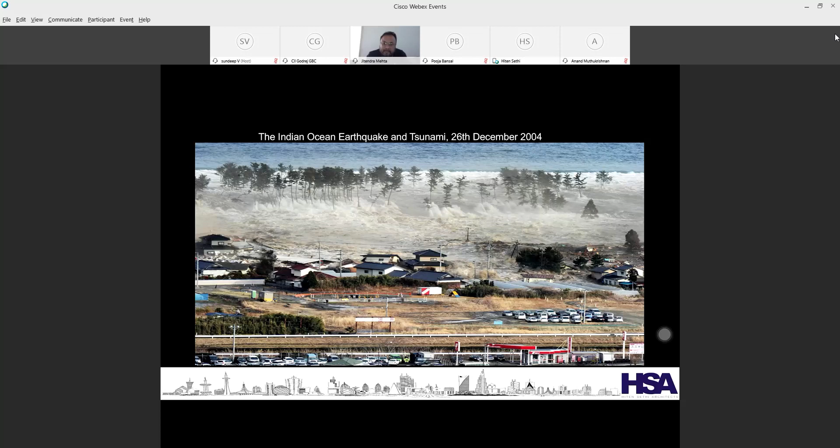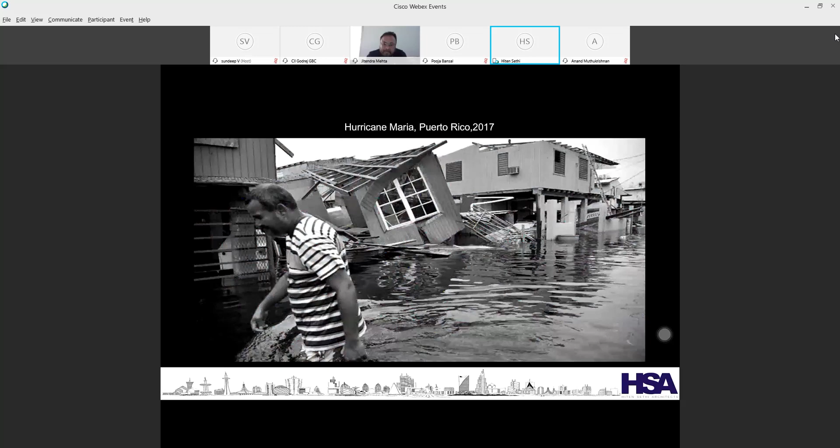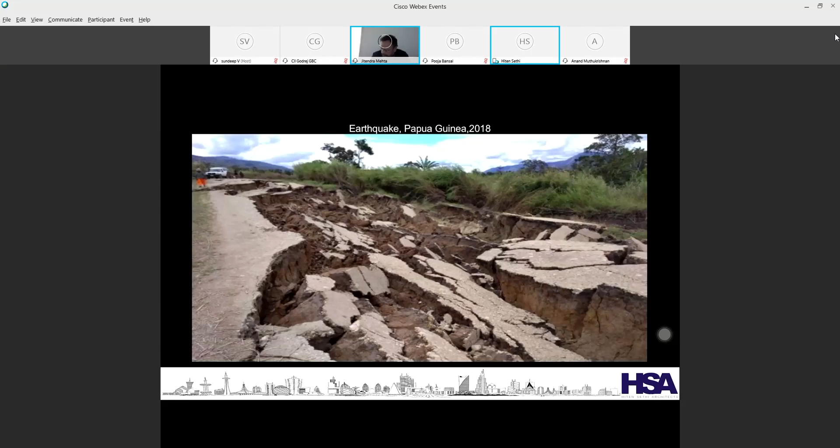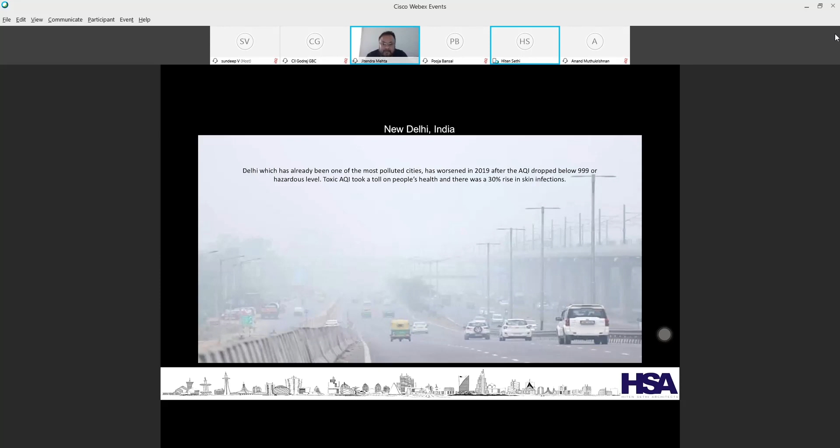And finally, we come to a conclusion that we are the problem. And fortunately, we are also the solution. And our Earth needs our help. We are professionals in different fields. Right now on the platform, we have architects, builders, engineers, environmentalists, manufacturers. We have the solutions. We cannot change the world, but we can definitely do our bit to change the world. So what more needs to be seen? There's a visible climatic change which triggered the green building movement. As participants from the building industry, this is what we can become a part of in a very serious and matured fashion.

What is part of sustainability? It is just a symbiotic meshing of region, city, district, site and building as a powerful synergy. I read one question asking whether green buildings and sustainable buildings are the same. I think they are synonyms. We see green as a color of peace, of freshness, a color of growth. Sustainability is just a way to achieve that. So basically, green architecture or sustainable architecture works out the same. With this, I would like to start my presentation on a case study.

We are doing right now a National Cancer Institute in Nagpur. Many of you know Nagpur has a very extreme climate, and there were no major super specialized hospitals like cancer institutes in central India. So this location was not only feeding Nagpur and Maharashtra, but also places like Raipur, central Madhya Pradesh, Jabalpur, and all those places around.

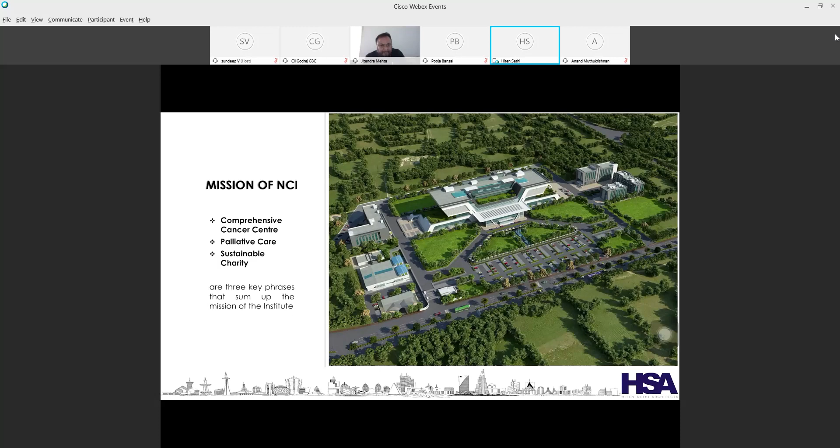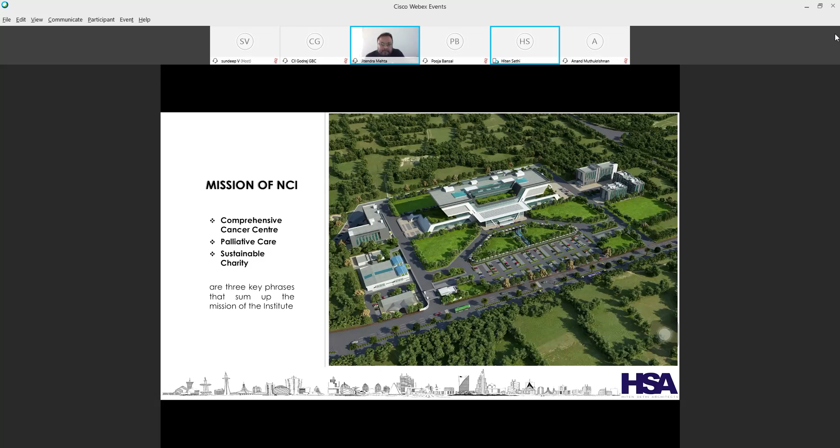This hospital is already serving right now, I think phase two has been handed over, and it is charging even less than what Tata Hospital is charging in Mumbai. So when we started developing this design, we thought, what will be my basis of design? As the project needs a curable solution, the first thing was that we need to talk about stability.

Then we wanted to talk about sustainability. Then we wanted to reflect positivity. Most important for such kind of projects is credibility. To get to these things, you need out of box thinking. It's not only out of box thinking for architects, it's out of box thinking for people who are going to use this place. It's an equally creative place as design studios, because the total treatment for this disease itself is quite an unconventional system.

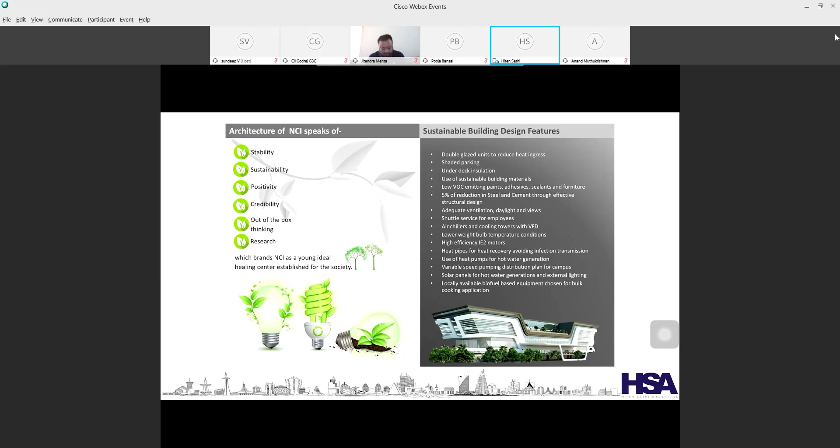And most important, which we realized when I was representing the government of Maharashtra in one of the conferences in Israel, was research. There were many new treatments coming out in terms of stem cell therapies and other therapies which are non-intrusive. So this was a brand which NCI wanted to take up as a young ideal healing center to be established in society. We'll come to the sustainable features which we added later on.

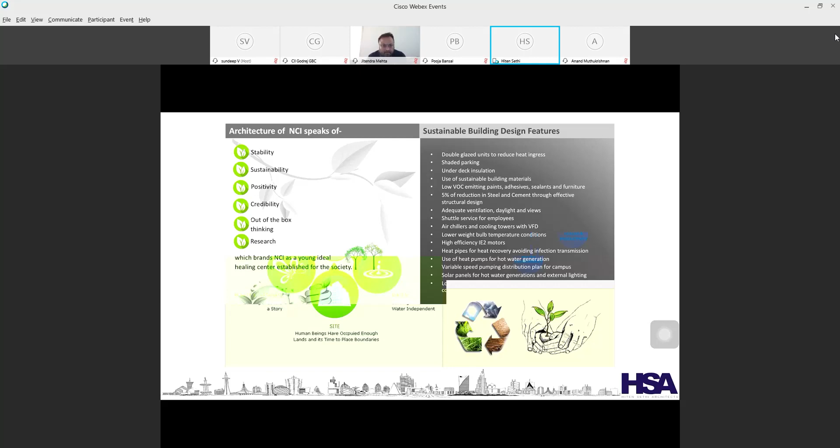But what we started with was how do we start the design? We got a site which was totally south oriented. The whole length of the site was facing south, and very interestingly, it didn't have much depth. So we did some case studies. There are seven different services we are offering, which I'm going to share in the slides later. So how do we start it?

As any architect would do, we do a sustainable study for the location of the site, the orientation of the site, the soil quality, the features in and around the site, the future developments proposed around it, the highways, since this is on the main highway and more are proposed, and how you want to tackle all these things in the design solution.

There is a misconception when I talk to people that green building design is only about using good technology: I'm not using CFLs, I use LEDs, I'm just using basic paints. It isn't. It's a part of the design solution. It has to start from the time the first idea starts to evolve in your mind. What is your structure going to do? How is it going to be functionally responsible?

Now we don't talk about beautiful buildings, because all architects are on board with beautiful designs. What we're talking about is a very simple thing: what is the performance of the building? What is the building performance index over the life cycle of the building? That is the total focus, these are the features you want right from when you take up the pencil to the last day when you hand over the keys to a client.

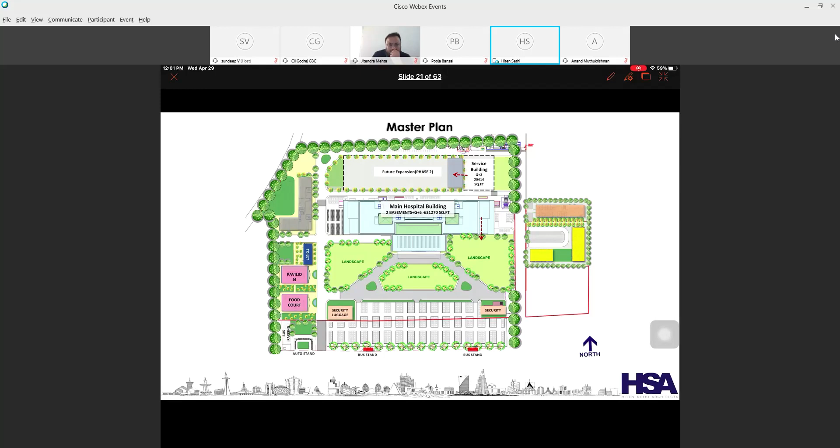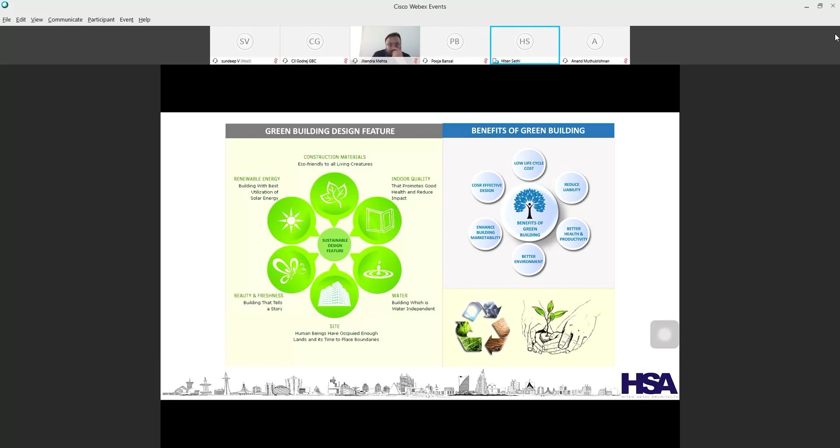So let me explain the design. As you see, my total project is on the southbound highway, so we created a quite interesting buffer in between the building and the highway. I've taken the building approximately 120 meters inside, so that I get an inner buffer coming from the main highway to the main building.

We had a strategy where we could have spread the whole project into different buildings, since there are 5 to 7 departments that are going to happen. Considering the climatological presence in Nagpur, we decided to consolidate all the MEP services and backup into one building, so that we can talk about more efficiency and recyclability of all the materials and spaces we are going to create.

Since this is charitable, we wanted to create a zone where we could give particular facilities free of cost to people. On the west side, we have a pink shade pavilion and food court, a shared kind of structure conceived for lots of Adivasis coming in who don't know about this particular disease, and who are detected at stage 3 or stage 4.

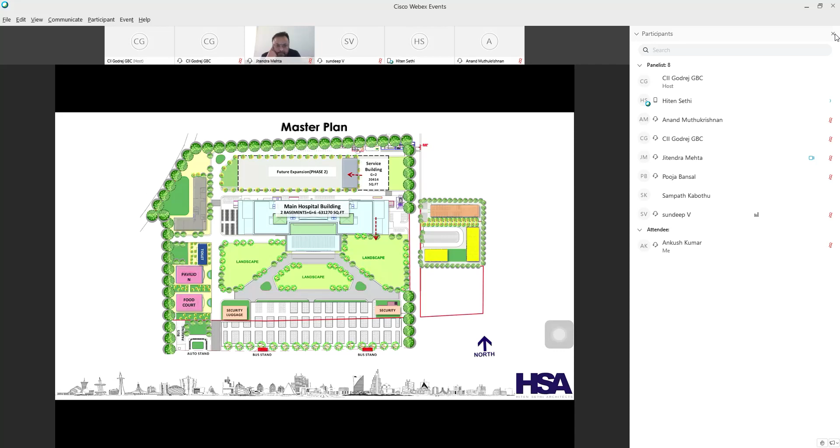So the ideal situation is that we have segregated the whole thing into particular zones. We created lay-bys at the entrance where buses will be standing, we talked about circulation patterns of patients dropping in and moving in and out, and we created the car parking right at the entrance.

Right now, presently, it's all covered with solar panels, and we are creating 1 megawatt of solar energy during the construction time, not after. We, in fact, installed these when my plinth was already coming up, so we have been using this energy to our benefit.

If you go further, the circulations we created separated pedestrian from vehicular traffic, and enough buffers and levels were created so that vehicular traffic is actually hidden away from the main pedestrian entrances.

We created a front porch where you see the ground floor entrance written - an independent, isolated 15-20,000 square feet entrance space detached from the main building. We wanted to start this building when we had just created double basements, where I had already installed my LINACs and other services, radiotherapies, CT scans, and so on. So instead of waiting for the main building, we created this entrance porch and dug a tunnel so construction could keep going on the upper level, while we started at least 70 beds at that stage in phase one.

By the end of a couple of months, it was 100 beds, and right now 220 beds are already in operation. We're just waiting for another year, and we should be able to hand over 500 beds.

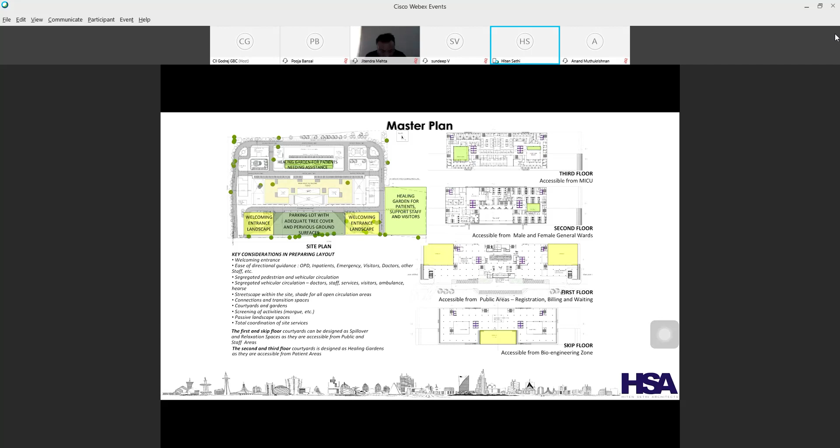Now, you'll be surprised - the kind of cantilevers and structural innovations we have done, with lots of cantilevers happening on the upper level, which I'll show you in the coming sections.

We've created those spaces in such a way that even the shadows of those particular cantilevers are supporting our healing areas, in some sort of shadowing strategy.

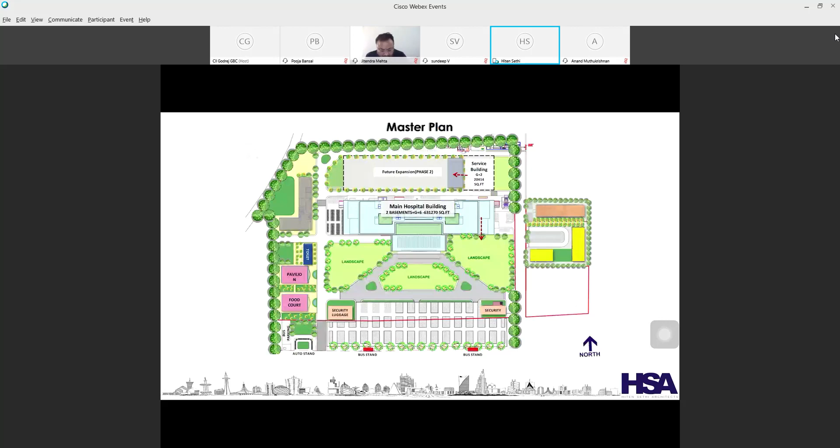So these are the basics, just to run through: we have entrance and waiting, reception, and diagnostics. Anybody working in a hospital understands how the blockings were organized in a particular way.

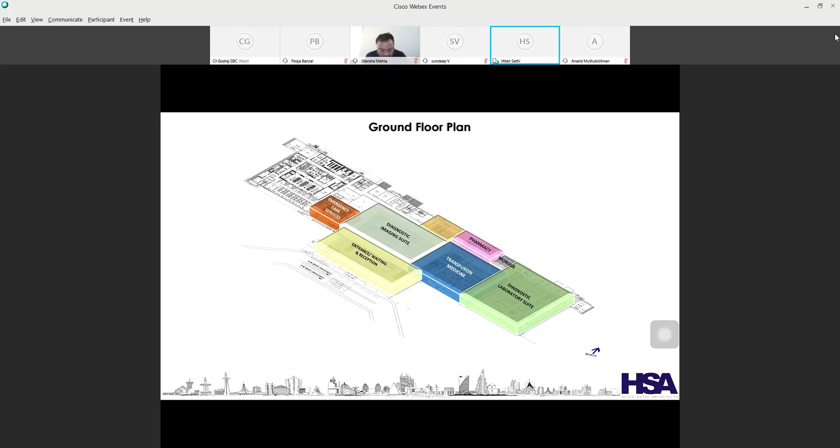The emergency services had a parallel road away from the 12-meter driveway that we created at the main entrance. We had admin areas overlooking the food, stationery, and other things in and around. So minimum walking spaces were the criteria.

Second, we also wanted less collision between different departments until the time it was required to move between them, so we divided the departments into various levels.

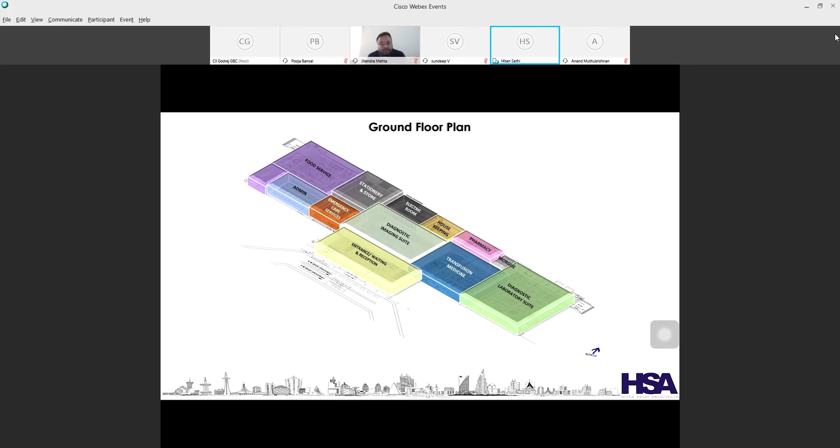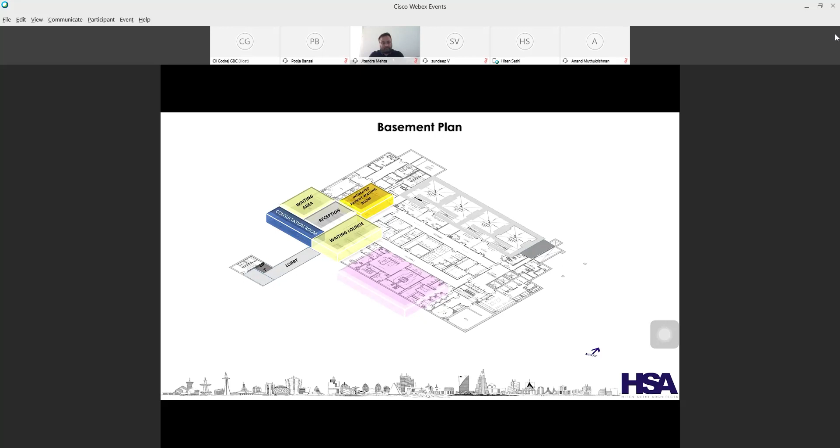As you see, we went to the basement first, so it's not a complete basement — we created a partial two-level basement. Then we have the tunnel which we created at the entrance, the lobby, a staircase, and a lift provided.

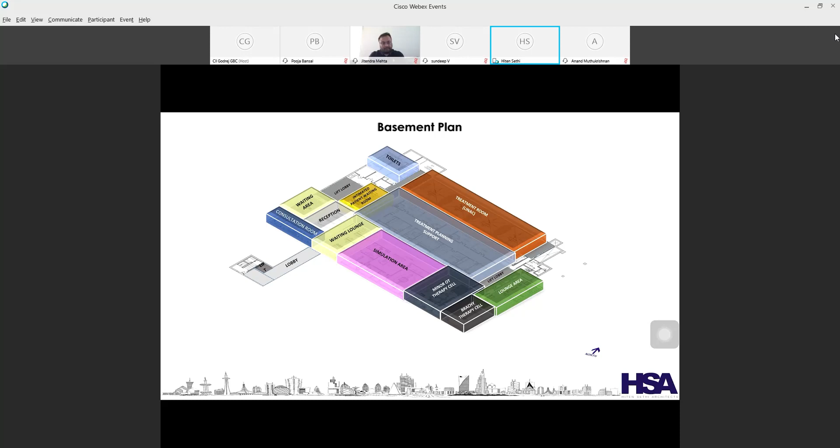So you enter and come to the waiting lounge, and all these clinical rooms and treatment planning facilities became operational within 1.5 years of starting this project. So even though the project went on a phased basis, we kept adding to the various levels.

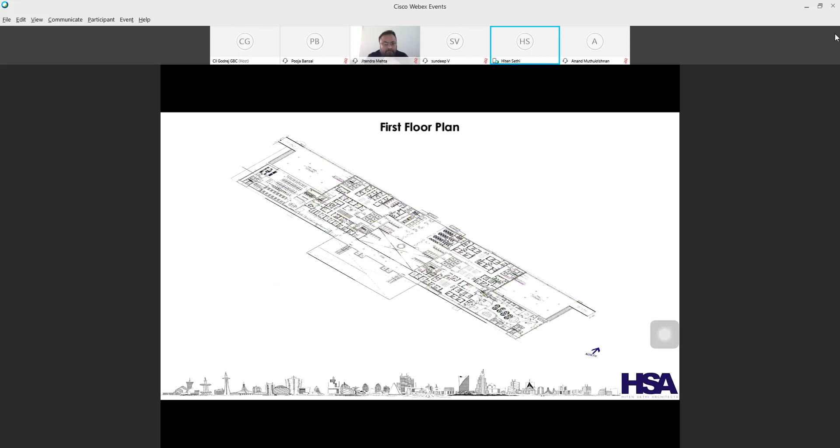By this strategy, we had the first floor plan where you have the ground floor, then come to the upper level. It's a very high ceiling entrance, and since Nagpur has a hot climate, we thought this might be an interesting feature to add.

Immediately next to that area, we gave maximum public interface areas like OPDs next to each other, and all OPDs were connected to cafeterias with open terraces. These terraces were designed with the special needs of cafeterias in mind.

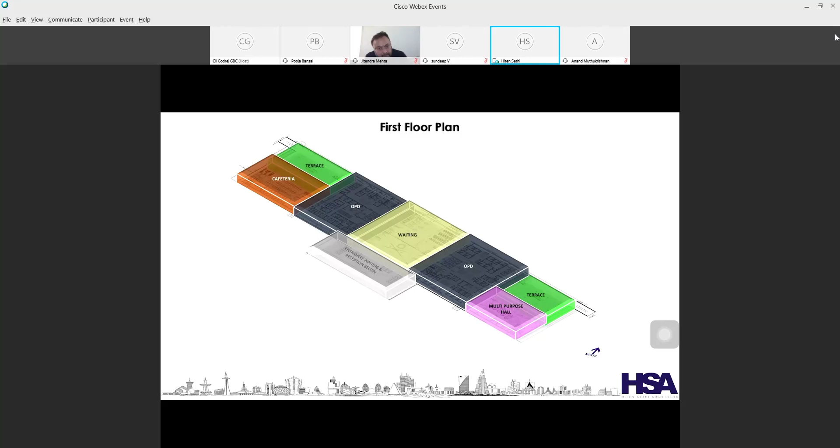Similarly, on the eastern side, we created a multi-purpose hall and the admin wing, which comes from the ground floor and has its own terrace. The multi-purpose hall opens into a pre-function area and to the terrace area.

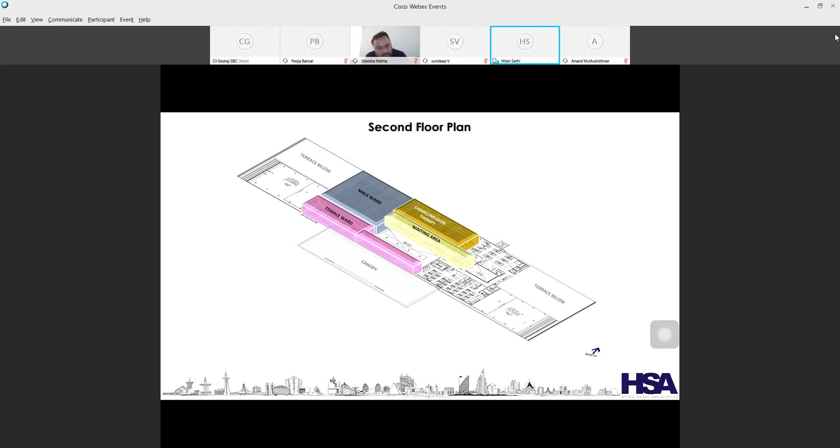Then we come to the second floor, where we have IPDs and various wards with their own waiting areas used for various things. You can see how the different departments have been placed so that they have their own privacy at the same time.

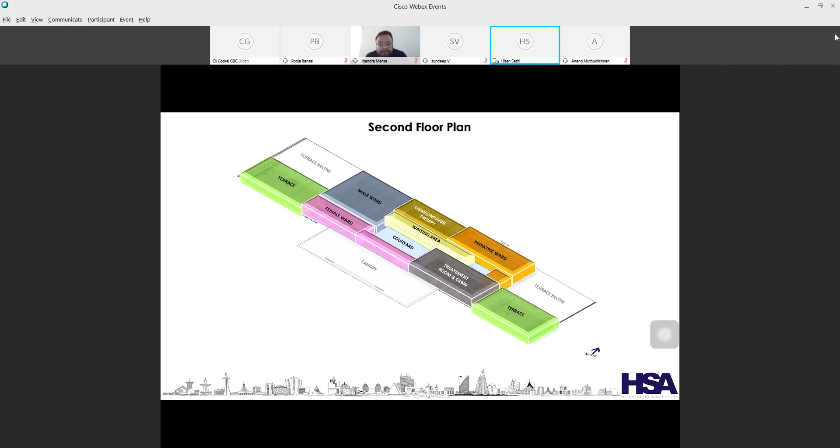At this particular level, we started adding courtyards at two different blue areas, where we have lots of infusions happening into the whole building, acting as light wells in and around it.

Then we have the third floor plan with typical residential MICU and ICU cubicles placed amongst each other. These courtyards actually gave support to the lift lobbies, and the lift lobbies themselves became well-lit with an interesting view, rather than the dead spaces we normally see in hospitals. This also helps create a good micro-environment in and around the project as we conceived it.

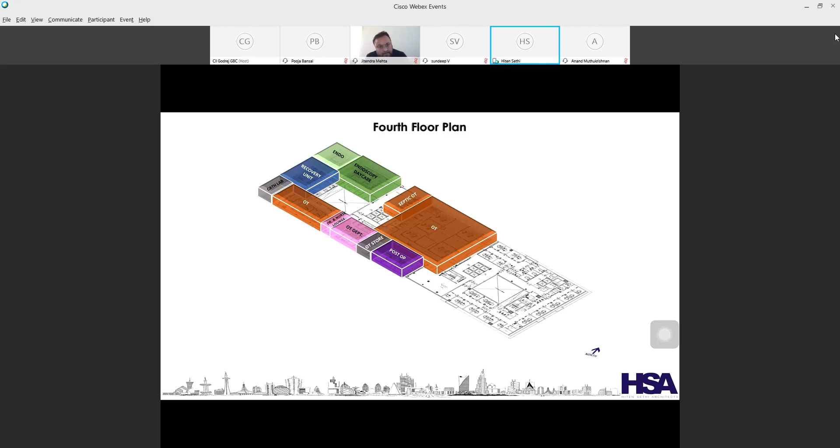Then, as we go further, we have the fourth floor where we have the OT departments. If you see, the courtyards have gone a little bigger, so we changed the spaces and came to different courtyard configurations, adding a bit more area so that the recovery areas also benefit from this strategy.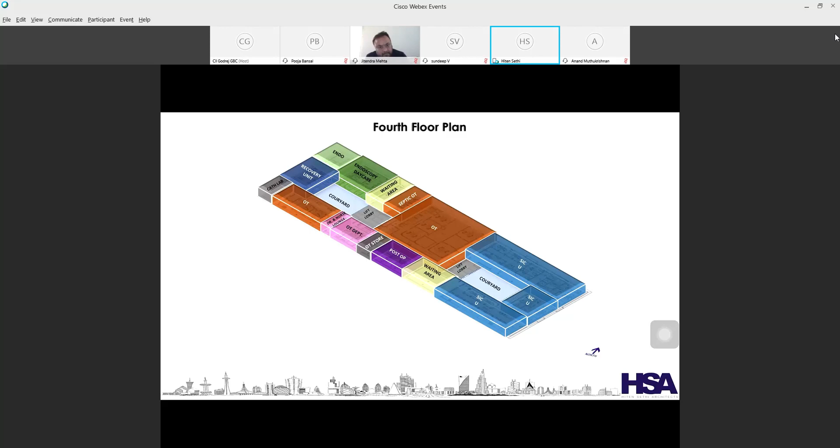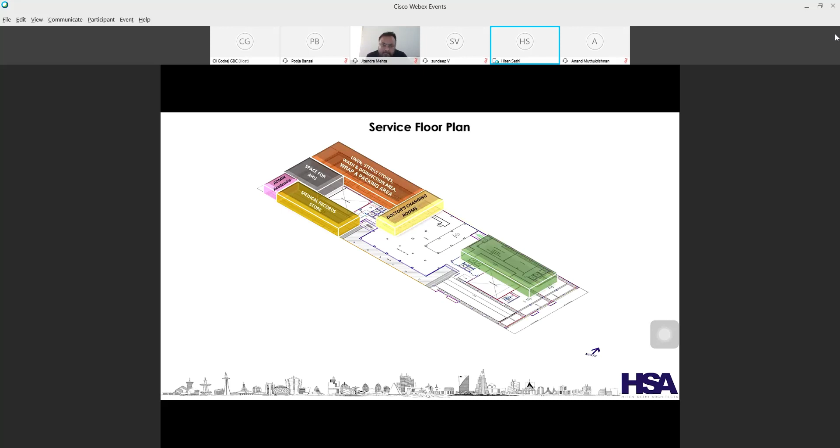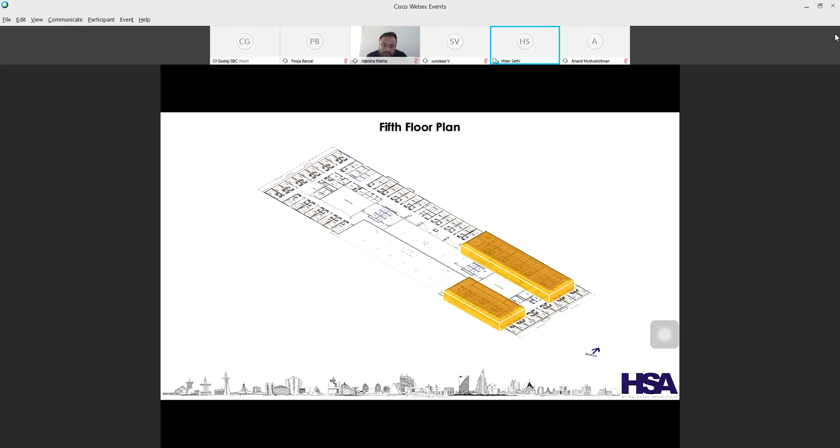Then we have a service floor, because now on the left side and the right side we've taken a 20-meter cantilever which recedes from the third floor, fourth floor, and goes up to the higher floor where we had more area. These cantilevers actually provided very good shade to the landscape areas we created on the first and third floors.

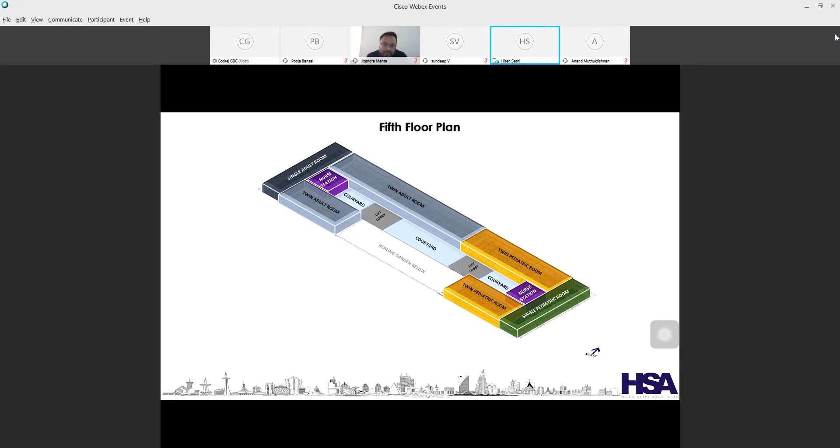These are different types of rooms which we moved to different floors. The sixth floor was the executive floor, and the most specialized element, the bone marrow transplant unit, was placed in a location that needed absolute seclusion.

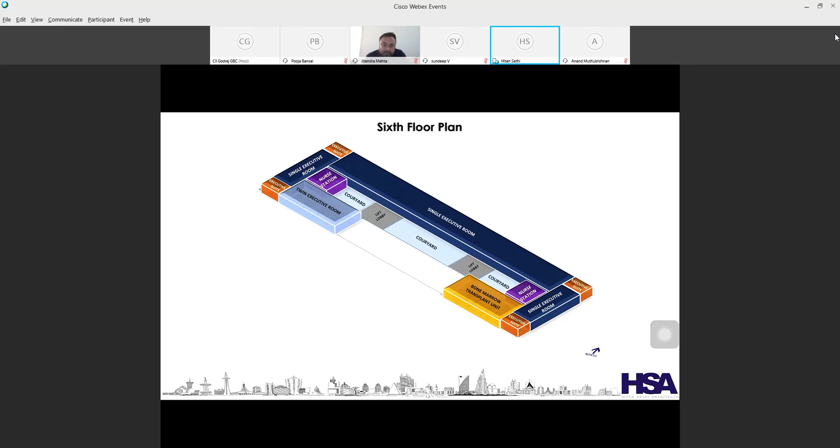Now, knowing that my facade is on the south, the whole strategy had to consider the climatological conditions and the temperature variations between hot and cold climates, following the average sun path. We created these particular things so we knew exactly where our key points were.

So even when we did the internal planning of the whole thing, we created sort of passageways and buffers, you can say walkways, between the south face and the main inside wall, so that the inside temperature remains insulated and it remains more optimal. So depending upon the different functions which I showed you, we created different strategies at different floors as a part

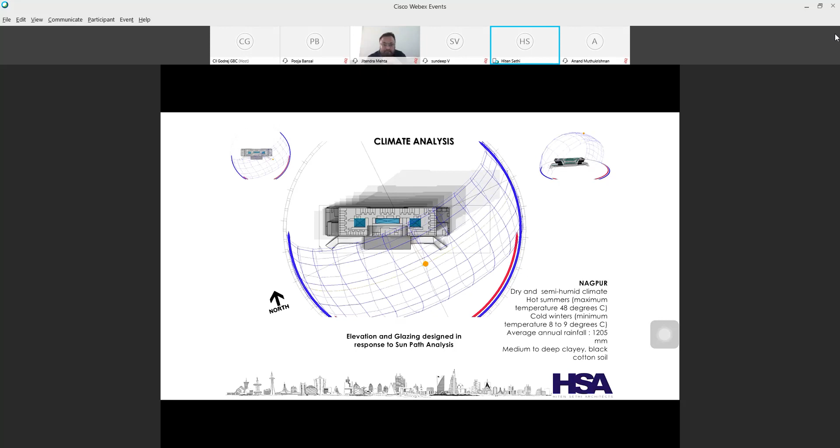of our interiors plan. The elevation had to be robust, because they wanted it to have a particular, very robust kind of character which they wanted to impart on that particular site. NCI had a logo which was more like a bird, a dove or something. So we conceived the same kind of architecture for these particular things. And as you see on the left and right side, the same strategy.

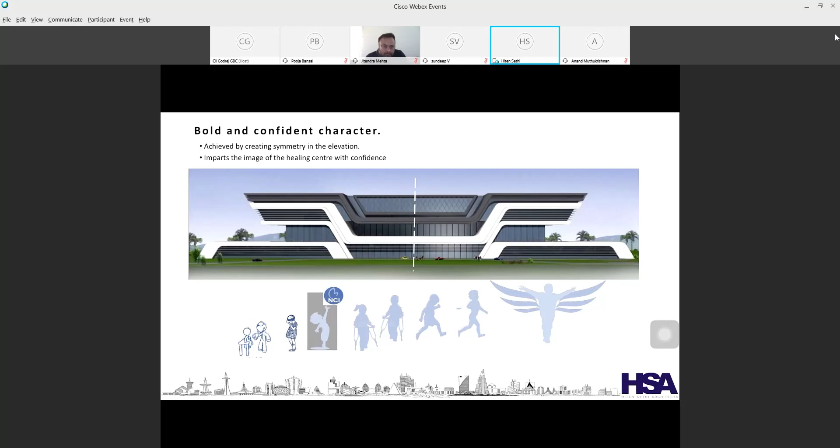I'll give you the detailed explanation in the coming slides of how these particular things are helping me to have a good climate in the gardens as well as the rooms which occupy below. It was a perfectly symmetrical, huge site, and now this site becomes quite an imploring and bold mass, which looks very interesting. And the idea is to have the whole thing being looked on. So this is what we created, and the structure has its wings and talks about freedom.

You will be surprised that whenever I go there for meetings, what we see is that people are not interested in sitting in the lobbies, as we normally see in different hospitals. These people are using the central lawn to the maximum extent. I've actually created lots of mounds. The site had too much rock, so we have used rubble for people to actually sit there.

Water has its own effect on the whole climate. Once we started talking about strategies, we knew that it's going to be air conditioned, and the air conditioning is going to be the major guzzler in my project. So we thought that we need to get the right optimal kind of glazing. I think the earlier specs we gave were normal DGUs, and we had worked out an air conditioning load according to that particular module.

As time went on, we had frozen more of our plans on the upper floors in different phases. We came to the conclusion that now is the time when we need to cover it and close the envelope in a particular way. To bring out the efficiency in air conditioning, we did various analyses of U factors and various types of performance glasses which fit our design strategies in the southern, northern and western areas.

And we found that a particular type of performance glass came out to be very efficient. And I can tell you that we were able to save at least 27 to 30% of my capital cost of air conditioning. And now, since my AC plants and AHUs are already bought, I'm making another building where I'm utilizing them as part of our design strategies.

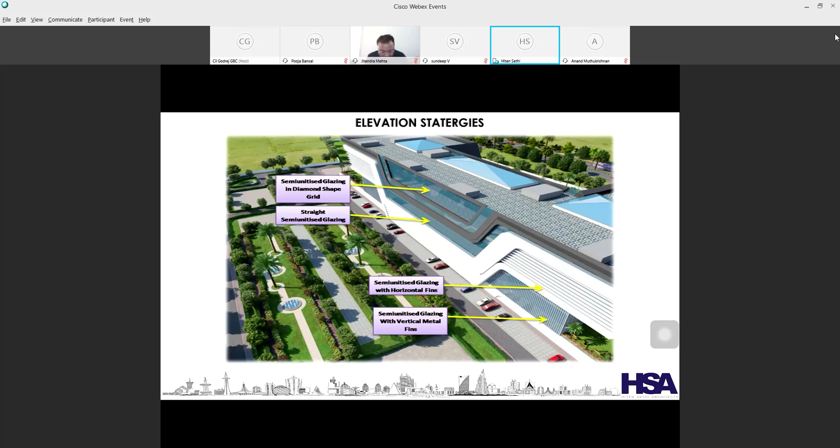So though it looks like a glass building, the glass to wall ratio is just 22%. So we have lots of solid masses in the architectural format, and the glazings which you see have been covered up by canopies, which give shade on the complete movement of people in and around, not compromising on the air quality inside those movement zones.

These recesses are quite deep, so I was not worried about FSI here, being Nagpur and the kind of hospital which I was designing. So we actually took lots of deep shades. All these boxings are like 1 meter deep, starting from 0.62 and going up to 1.2 meters deep at various places. So eventually they are being used as service corridors also at some places.

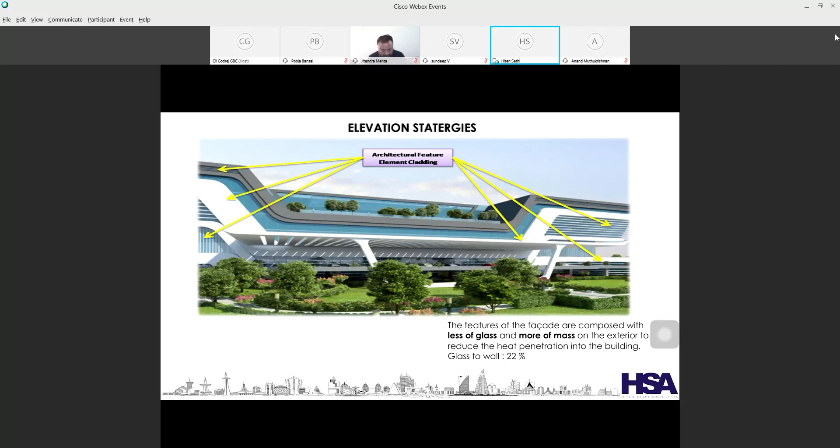And then on all the southern portions and other portions, we actually created louvers, which became an interesting strategy for me to have a good ambience of the garden to the rooms in those particular areas, and so on and so forth. So these were the six verticals which we tried to accommodate on every floor: diagnostic and emergency, ambulatory service on the ground floor, ambulatory care service, surgical suites on the upper floors, clinical and general supports, and hospital engineering services.

Then, as I was telling you, we had the green street concept, which was pedestrian friendly, and many thousands of cubic feet of soil volumes were actually implanted. The site was rocky, so we had to create a good amount of landscape by getting good soil volumes, creating more soil volumes from the places where we were able to extract them.

So the site was so rocky that we actually recycled those rubbles into all the road constructions happening within my site, as well as the highways. We were able to give it to the highway contractors, which turned out to be literally free of cost for us. Then we had biospheres, which we created around that particular building as a part of the landscape features.

As you see, my parking is at the start of the project. So the travel distance between the parking and the building is 100 meters. So we actually created a 50 meter walkway through the water bodies around. And for people going to other areas, we had bike lanes, and we will have some other modes of transport, maybe modified autos, electric autos, which would carry those people. It's not a general hospital; it's a specialized hospital, so we have some liberties to work on the different volumes of people who are going to use it.

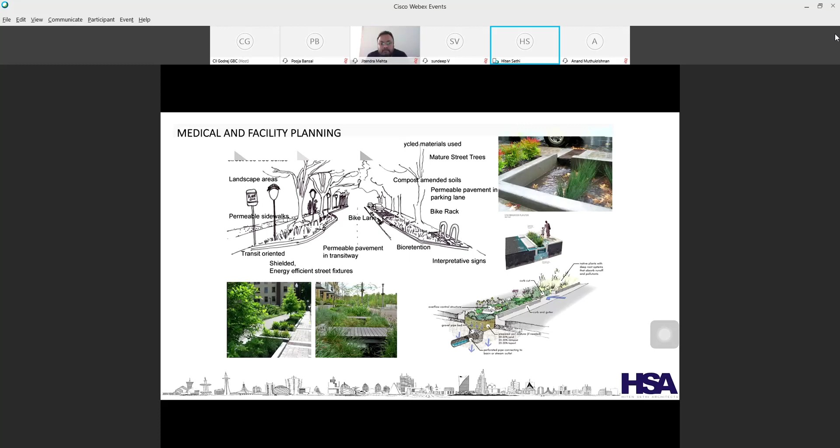Similarly, once you come inside, the healing garden became a very important concept for me to work out. In this picture you're seeing a space which could have been a barren space, and you have characterized the whole landscaping with the same principles, which engage all your five senses: sense of place, sense of life, sense of compassion, sense of community, sense of security. So all these things get amalgamated and synergized into your design strategy when you put them together. So it's great to know your functions properly, so that you are able to think simultaneously and involve these things at the same time as a part of your product.

So basically, the benefits I get are functionality, maintainability, being environmentally sound, cost effective, and visually pleasing. So we have already completed the ground level landscape areas, and now we are working on the upper floors.

As I was telling you about glass, we use DGUs definitely to reduce heat ingress, but at the same time not compromising on ventilation and daylight design. So I have analysis on literally every space in terms of energy modeling, and the different other studies which we did of the elements we have used.

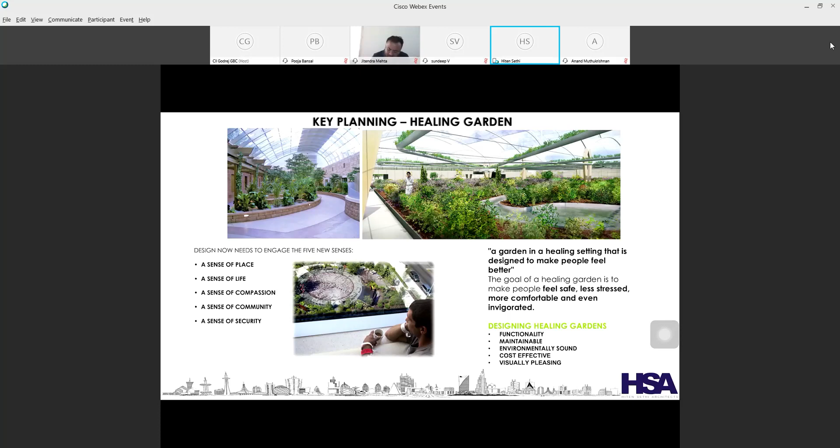So we collaborated with Jindal JSW, and we came up with a solution of giving a 20-meter cantilever with four live floors onto that particular thing. And we were actually really surprised that we were able to save on steel and cement through this particular effective design, not mentioning whatever time we saved on the whole thing.

MEP planning again, we had high efficiency water cooled chillers. We had VFDs, which we have used, environment friendly refrigerant systems, CO2 monitoring and control. For me, air quality is a very important thing. 50% of mostly all the irrigation systems have used recycled water, and we've used drip irrigation for most of the things. We were actually able to reduce our domestic water consumption by 25%. STPs, of course, have been provided.

We also contracted a third-party validation of MEP system performances because it's a very MEP intensive project. So the whole thing is how we tried to save our capital cost, from I think 1,800 tons to 1,300 tons in phase one. So even when we did the cost analysis, we were able to actually save around 1.2 crore of electrical cost from my earlier design strategy to this design strategy.

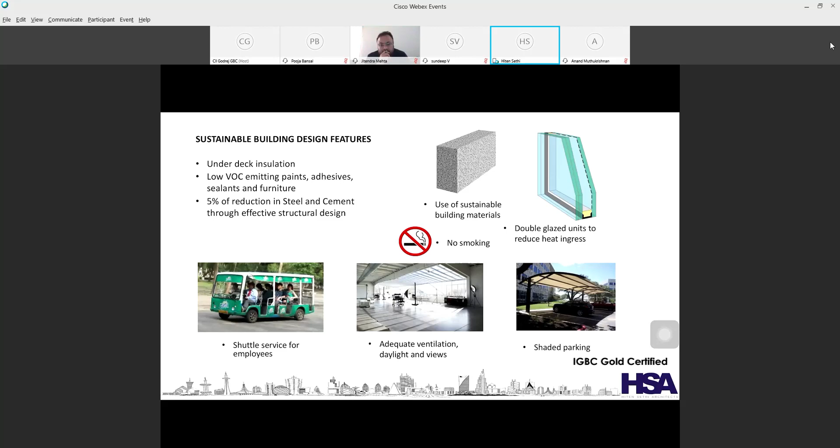Then, of course, organic waste composting and everything. Solar power, we had a very interesting study. So what we did was we actually utilized the barren open land which hosts my car parking right now, and we created a 1 megawatt, 900 kW solar plant initially, before the building even started coming up as substructure. The benefit which I got was, till today I've not spent any money on the cost of electricity.

So how? When you conceive of a project, you work out a particular strategy, like 3% or 2% is the cost of electricity when you do any tendering or costing of any particular project. So for example, if my project is 550 crores, 2% itself was coming to around 11 to 12 crore rupees. My cost of installing this 1 megawatt plant was 4.5 crores after subsidies from different departments. The whole project is going to get over next year, and I've not spent any money. So we have already recovered three times the cost with this kind of strategy.

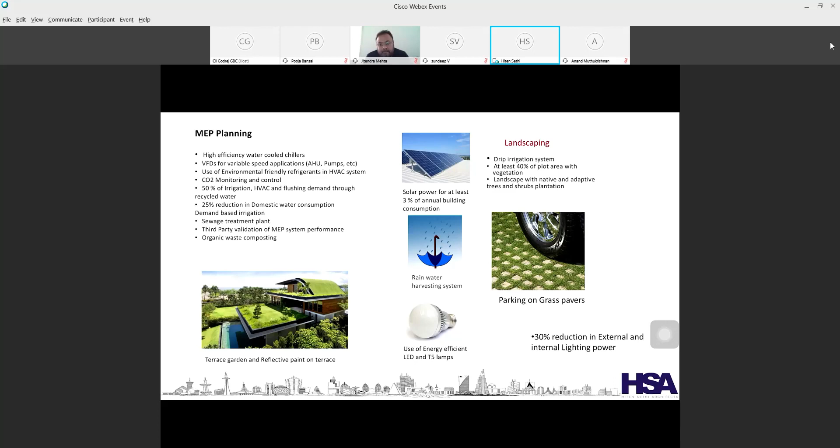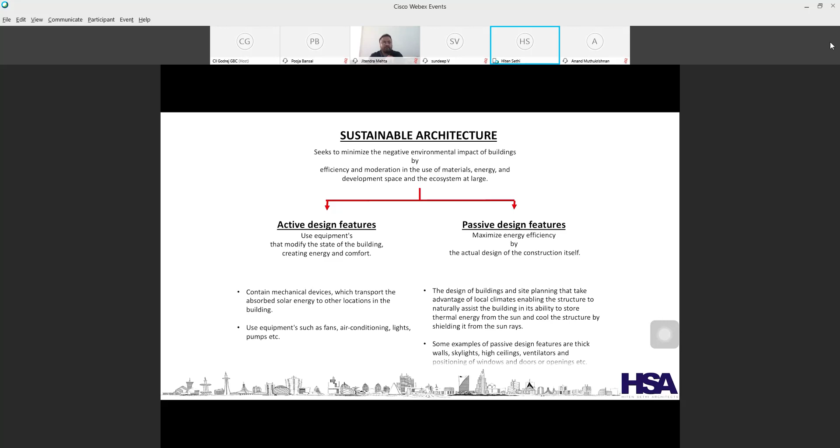Nagpur again is a very dry climate, so we used pavers. So to sum it up, we used sustainable architecture as a tool to cover the strategies of different departments under one envelope, into active design features and passive design features. In active design features we used the best of technology, equipment, modern state of the art building, right from my LINACs, which are top of the world. We're using therapy, CT scans, and even mammography machines. I think they're the next generation machines which we have put there as a facility.

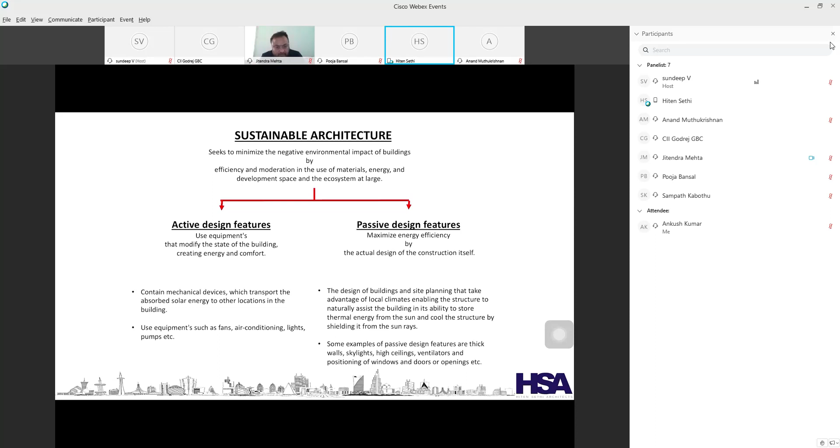But at the same time, with my passive design strategies, compared to a conventional system, we were able to save as much as 17% of the energy at the initial time when we were designing the whole thing. Use of local materials, a study of local climate, a study of water management over there. All these things, as I explained to you earlier, gave me a good result.

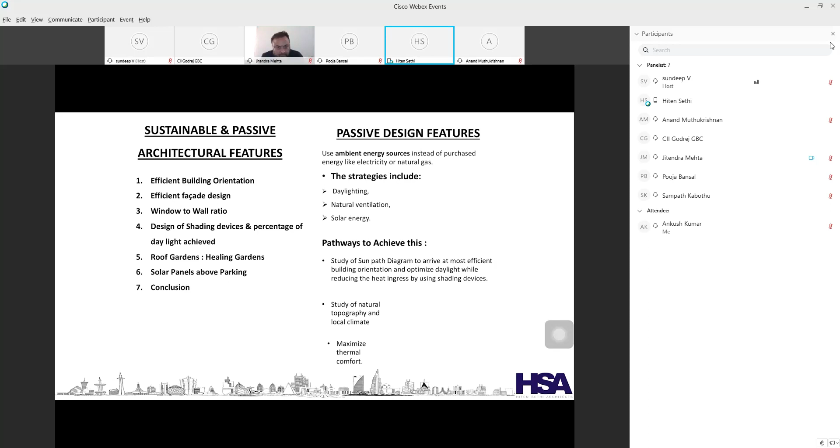So, to summarize the sustainable passive architecture, we had efficient building orientations. Orientation is not in an architect's hand to a certain extent, but there are ways to mitigate it, and there's always a balance you would like to keep for your branding, and then you come up with an optimal solution for everything. Facade design plays a very important role: your window to wall ratio, design of shading devices, and percentage of daylight achieved.

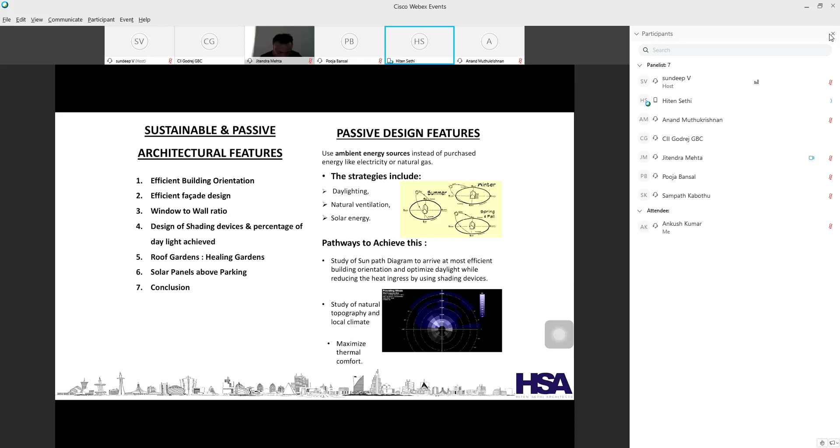Roof gardens, which were there as part of healing gardens, solar panels, and finally the conclusive manuals you were able to get for running that building. So the strategy for ambient energy usage included daylighting, natural ventilation, and solar energy. And as I've already explained, we maximized thermal comfort and used topography and natural materials. This was the efficient building orientation, how we worked out the whole envelope at micro levels of elements like sunshades, deeper recesses, and fenestrations to optimize task-based lux levels and indoor temperature, so that even the lighting can be optimized.

Even the louvers which you see in the elevation, which look fantastic, were actually worked out on strategies. We actually studied even the angles of the strategy, whether the louvers should be horizontal or vertical, what are the effects on these particular louvers, what should be the depth of the louver. So these particular things were actually studied and reports made,

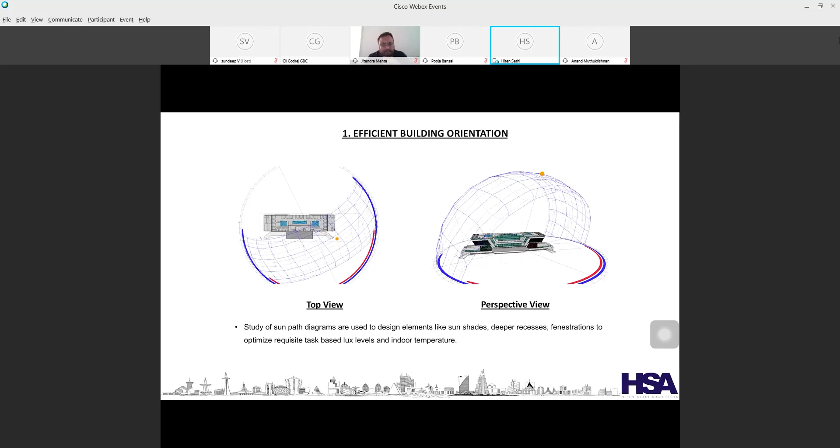and we were able to come out with a strategy of what we need from what time to what time, and you cannot have the same strategy for the southern face and for the north face or west face. So you need to work out a particular balancing kind of options after thorough studies are done.

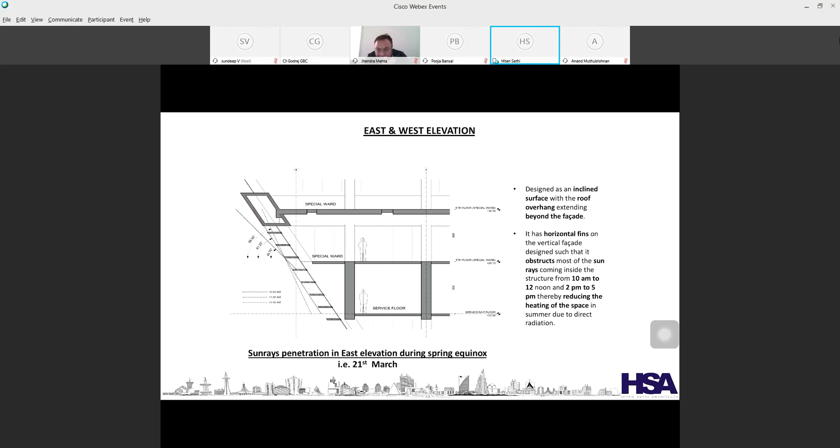As Anand was also showing, each louver, each sunshade has a different effect on your indoor light quality. So, what kind of materials for the louvers are to be used? What will the glazing indexes be, which will give you a complete ambience? In a surgical unit, you don't need so much light, so you can have deep recesses. What are the functions which are going to happen inside?

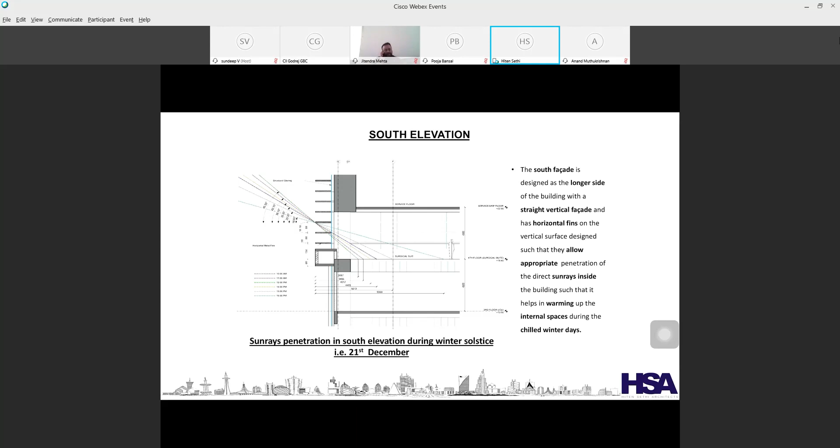So all these particular things actually come up as a part of analysis, to allow users the optimum sun rays which need to enter, and to use it as an efficient space inside. These are a couple of functionality studies we did. For typical glazed buildings, the ASHRAE baseline is 40%; we were able to maintain it to 38%.

Then, instead of using normal glass, we increased the thicknesses of DGU reflective performance glasses; we have gone to 24 mm. By increasing the cost of my glasses by 1.2 crores for the whole project, we were able to save an equal amount per year in electricity usage, and of course the capex of air conditioning.

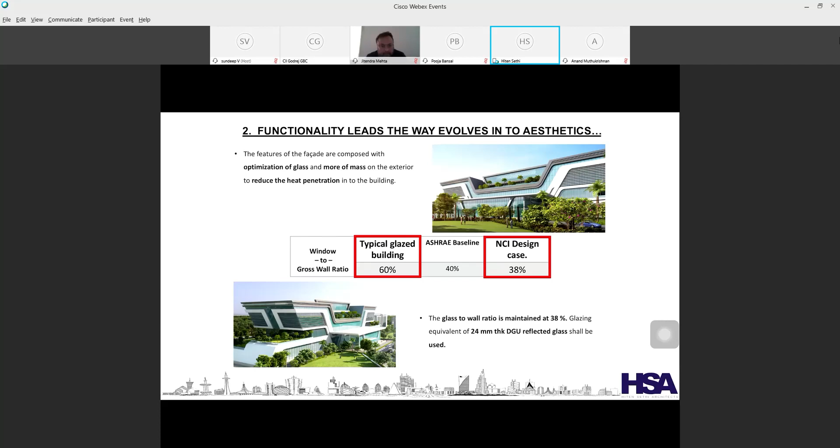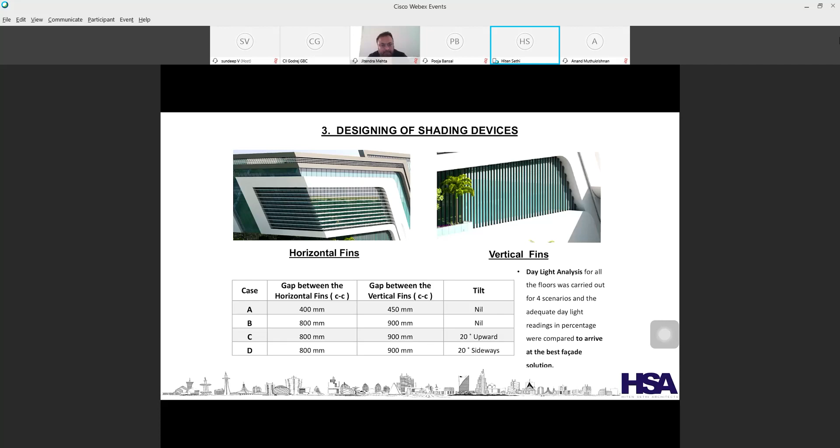Now these are a couple of studies which we did on designing of shading devices, various analysis of horizontal and vertical fins, and the tilts upwards or sideways. I actually wanted to see what effects these kinds of things have on my building, and the environment which needs to be given. So we studied what should be the optimal spacing between these two fins. These also become very important.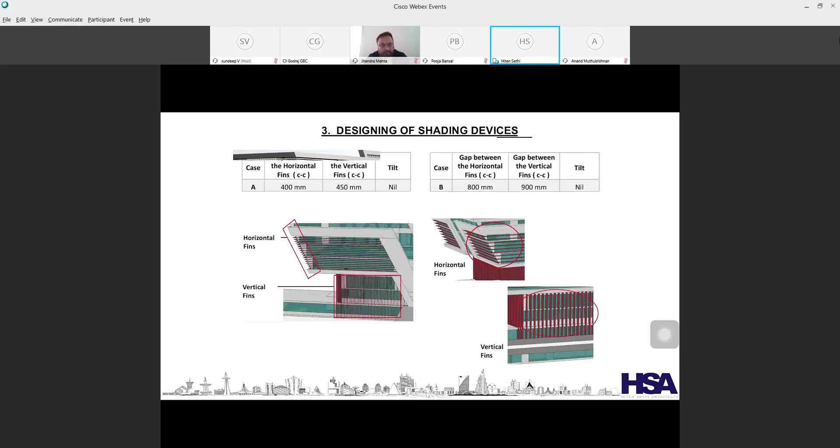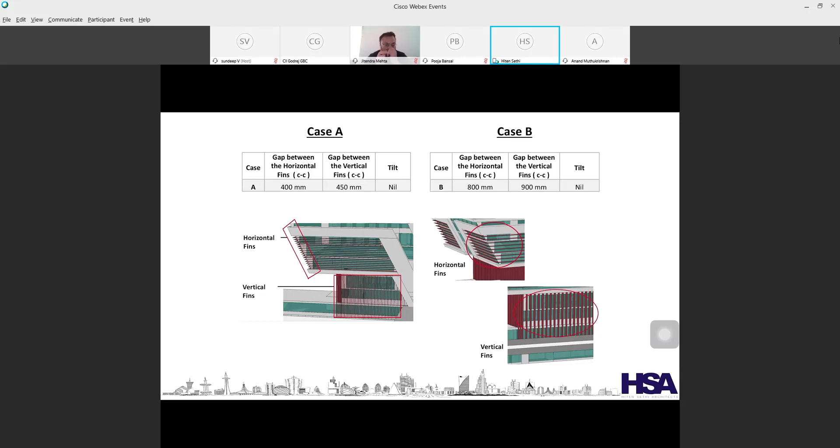So we did case studies where we had 1.5 feet and 3 feet or 2.5 feet of gaps which we wanted to create. We did all these thermal studies again, with a 20 degrees upward tilt and 20 degrees sideways. All these studies gave us various results. And you see, with the studies of case A, B, C, D, the different floors acted in a very different way.

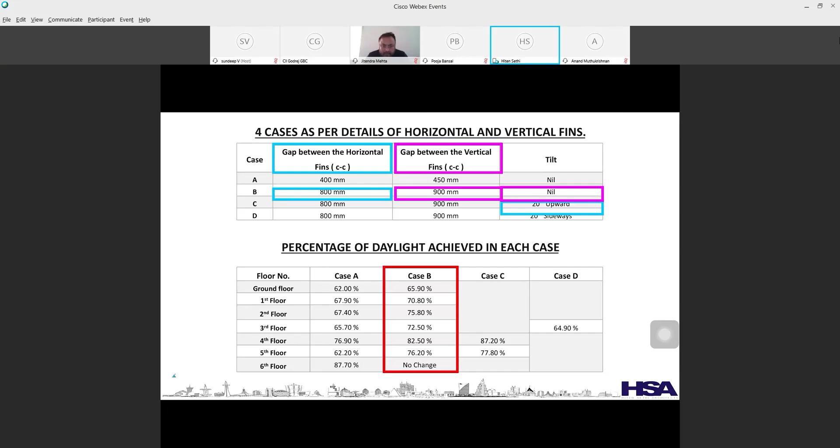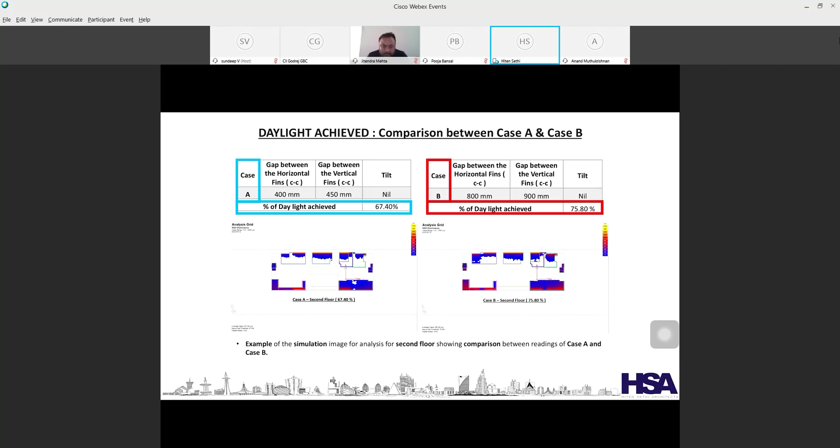And we realized that case B became more efficient in terms of daylight achieved. In case C, we had more glare coming in on the fourth floor, and similarly on other features. So the most efficient option was case B. Then we put it into different formats: what is the percent of daylight achieved? In case A, with louvers of 400, we had 67.4%, and in case B, we had 75.8% daylight achieved in those areas.

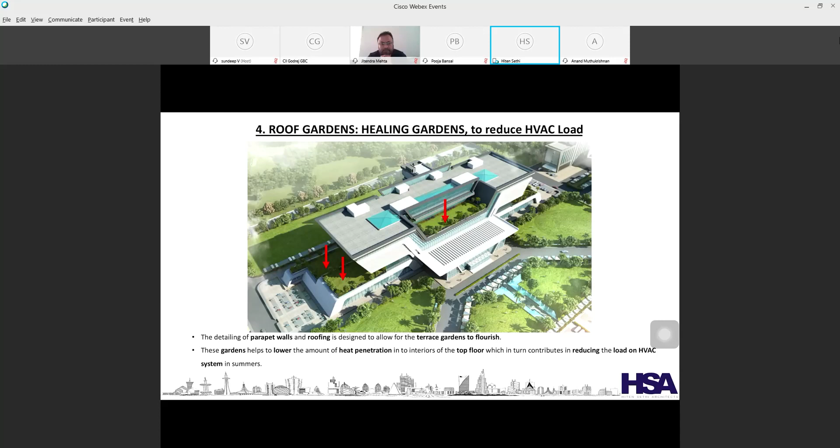Similarly, we did the same studies on the courtyard light wells we have created, and the skylights over here. And then what is the effect of terrace gardens, healing gardens as we call them? What is the reduction of heat loads because of this? Then solar panels again.

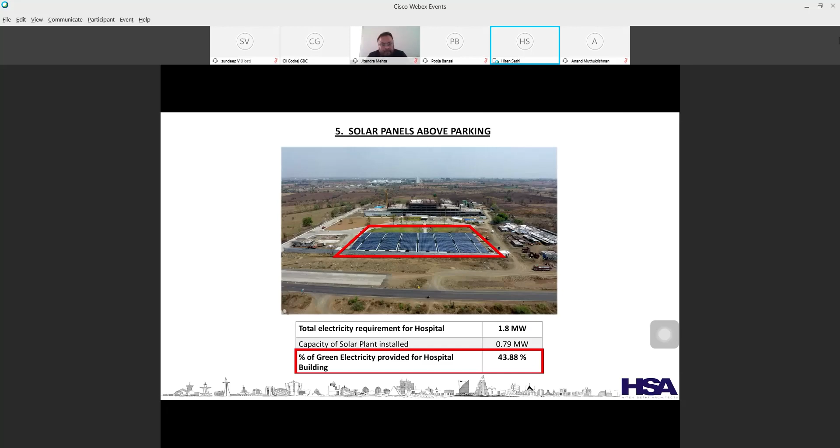Right now, of course, it was 1.8. Now it has increased. When it's completed, it will be around 4 to 5 megawatts of electricity, and we need to do a similar strategy in the coming phase during operation. The whole thing was appreciated by the government, and with the subsidy we got through MNRE and MEDA, we got a very exclusive costing of 3.37 crores, and we are generating 4,000 units every day.

So a VLT of 35% was used for the exterior glass in our window systems, and this was in turn seen in relation to the louvers we've used. Louver coverage was kept maximum where we increased the VLT, and where we minimized the VLT, we increased the other. So it goes hand in hand.

Similarly, single glass facades at certain areas only we have sort of created. With the total, if you see the summary, we had a reduction of 25% in annual energy required for indoor light, which is being achieved now, even in the part which is operational, and a reduction of 52.9% of annual energy required for fans could be achieved. So we had a strategy where, not only for purifying, even in the rooms we have actually added fans as a part of the strategy.

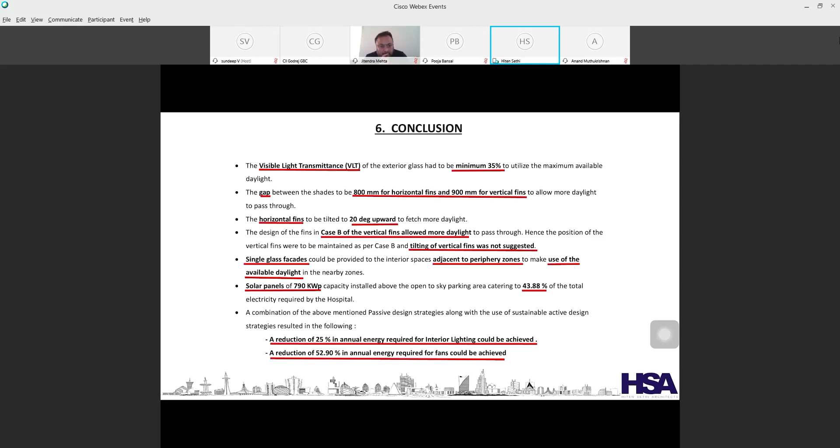So we are working on a strategy of keeping 25 degrees as a temperature. At phase one, Ratan Tata Saab himself was present, because this is one of the major installations, though not for the government of Maharashtra, but for Maharashtra itself. The first phase was inaugurated in 2016. We also got international recognition and an award for this particular institute as one of the best designed hospitals in South Asia Pacific.

Lastly, before I close, the Dalai Lama had a very good statement, which always guides me when I'm stuck in the design: human use, population, technology have reached a certain stage where Mother Earth no longer accepts our presence with silence. We need to do something about it. And now is the choice when we can pick our side and make this world a COVID-free, pollution-free world to stay in, so that more of our generations can enjoy the benefits of Mother Earth. Thank you.

Yeah, am I audible? Yeah, Jitendra, we can hear you. Can everybody hear me? Yes, I can hear you for sure. Yes, sir, everybody can hear you. Okay. Please go ahead, sir.